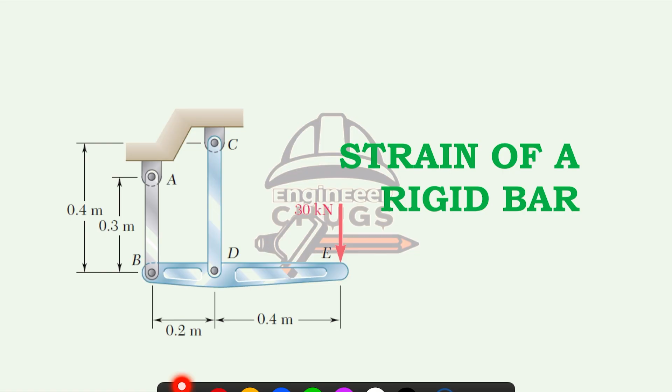The rigid bar BDE. So meron tayong rigid bar, the BDE is supported by the two links AB and CD. Link AB is made of aluminum, at given tayo ng kanyang elasticity of 70 GPa or gigapascal. At saka given din tayo ng kanyang cross-sectional area na 500 mm squared. And then the link CD is made of steel, with a modulus of elasticity of 200 gigapascal, and also given tayo ng 600 mm squared na area. Tapos given din tayo dito ng 30 kilonewton load.

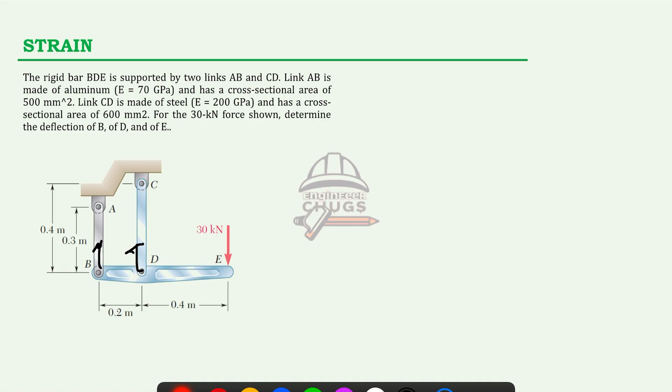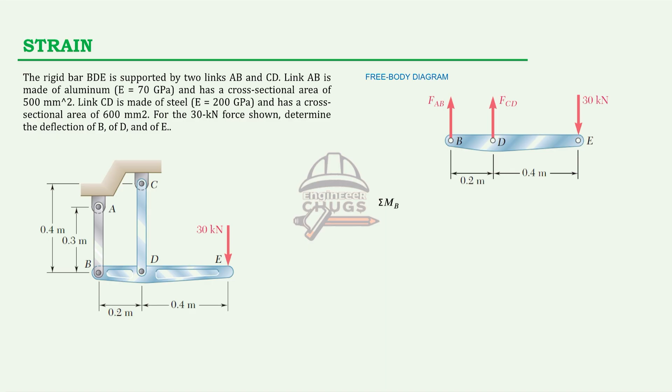Okay, so how will you solve this one? Pinakamadali is pwede kang mag-moment at B, or pwede kang mag-moment at D. So pwede tayo mag-moment at B. We take summation of moments at B is equal to 0. So, this would be FCD counterclockwise. Yung FCD kasi sumasalungat sa ating direction, at saka meron tayong 30 na umaayon sa ating direction. So FCD times 0.2, and we have 30 kilonewton times 0.6, the distance from B to E. So makukuha natin yung value ni FCD. So ibig sabihin, our assumption for FCD is correct, that is the arrow going up.

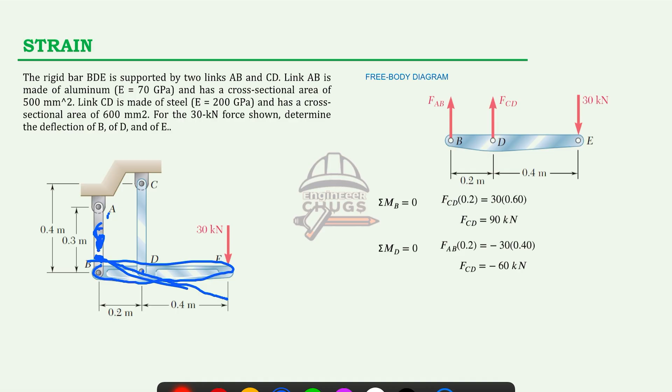Okay? So, I hope na nagigets nyo yung ating ibig sabihin na pag-tilt ng ating rigid bar. Diba? Kasi magti-tilt siya na pag ganito. Okay, so that is for our illustration in a free body diagram. I hope na gets nyo yan. Okay, solve natin for the deflection of B. The deflection of B, okay, ganito yung mangyayari dito sa portion na ito.

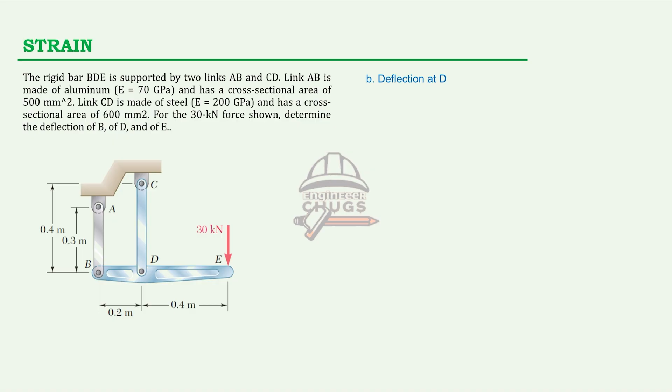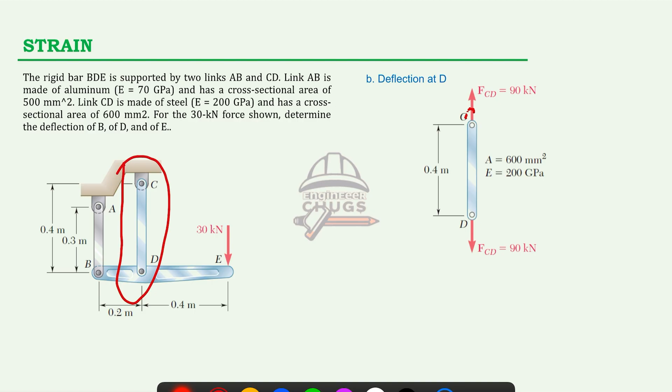So, next is determine the deflection at D. The deflection at D is ganito naman siya. Dito tayo mag-focus naman sa D. So, di ba nakuha natin that is 90 kN, that is for the tension. So, ito naman yung ating orientation for the tension. Okay? So, ibig sabihin, hahaba naman to. Yan, di ba? Magiging ganyan. Magkakaroon siya dito ng elongation naman. Or deformation. Or deflection. So, ganyan yung mangyayari naman sa kanya.

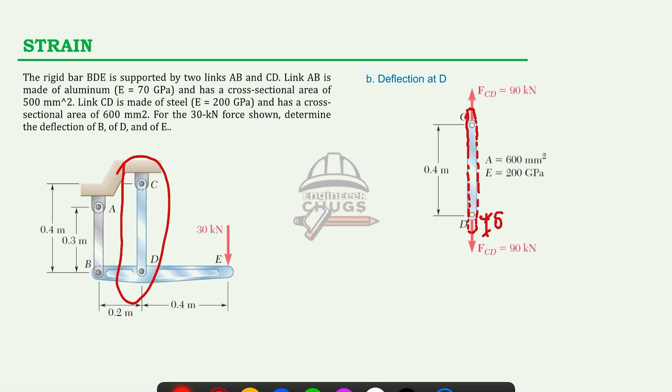Okay, so, ganun pa din yung ating magiging formula. The deflection at D is equal to PL over AE. And then, our P is FCD. That's why we have 90 kilonewton. Diba, 90 kilonewton, and our length is equivalent to 0.4, and our area is given, and our E is given din. So that's why we will be computing 0.30 mm yung ating deflection sa D. Okay, so that is our answer for our deflection at D.

So madali lang siya, di ba? Madali lang yung formula. Yung mahirap dyan is how will you deal with the strategy of making the free body diagram at saka ano yung magiging stress niya diyan, kung magiging compression ba or tension. So, yun yung kailangan mong aralin na i-master kung ano yung nangyayari sa materials or structure.

Okay? So, next naman, the deflection at E. Yun yung medyo mahirap na problem dito sa E, di ba? Kasi wala tayong given area. What is the area for E? Unknown. E, okay, pasok. Di ba? Yung E is pasok. Mayroon tayong 200, that is steel also.